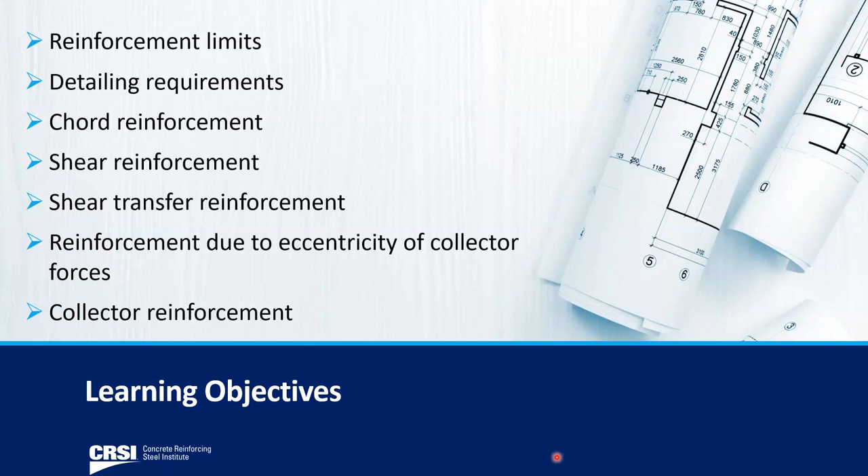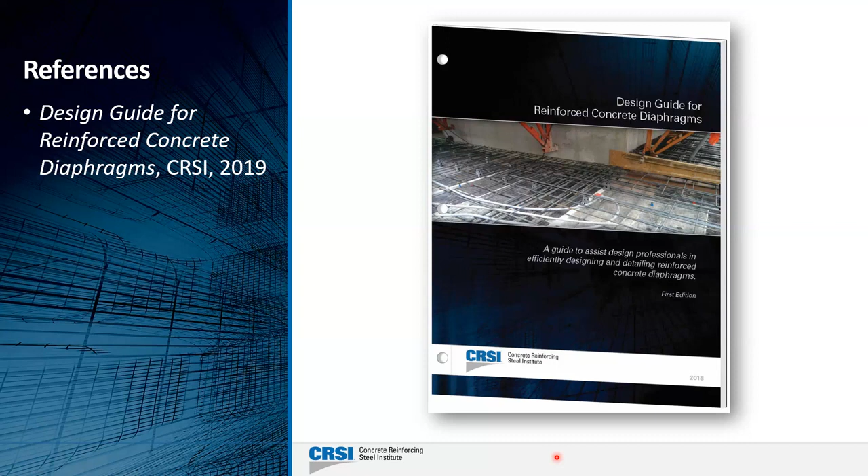So we'll start out by looking at some of the basic references this presentation is based on. We have a design guide for reinforced concrete diaphragms that we published not too long ago. It contains a lot of good information if you're not familiar with this type of structural element. It goes through how to determine the diaphragm thickness, how to get the diaphragm design forces based on ASCE 7-16 loads, and how to model diaphragms. Generally we have a computer program that will do this for us, and that's great, but it's also good to be able to check what's coming out of the computer program.

And if you have a simple structure, it may not be worth the time and effort to put it into the software. So for a lot of different reasons, it's good to have some simple models you can rely on. I've done a lot of comparison between these models and what you get out of a structural software program like ETABS, and for simple structures without a lot of different types of discontinuities, the numbers come out almost exactly the same. So you can rest assured these simple models give you good results.

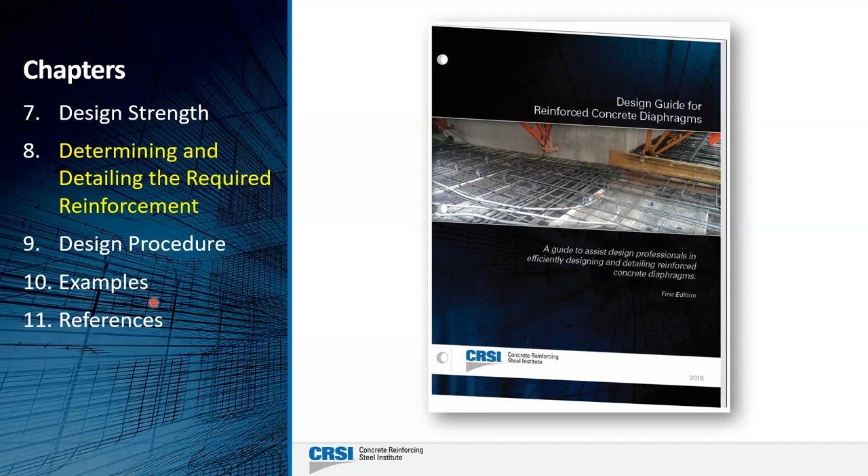We're going to focus on Chapter 8 of this publication, how to determine and detail the required reinforcement. Within our time, we'll give a brief overview, but it'll give you more information if you're not familiar with this particular topic. To round things out, there are a number of different examples that illustrate a lot of different types of structures in that design guide. So that gives you an overview of that.

You're going to see some references today for the ACI building code, and that's the 2019 edition. So if you see a section number from ACI, it's coming from that particular document. Also, there are some references to ASCE 7, and that's the 2016 edition. As you probably know, there's a 2022 edition that came out. Not too many changes for diaphragms, a few here and there, but basically it's more or less the same, especially for reinforced concrete structures.

So given that introduction, let's go ahead and take a look at some of the different aspects. We're going to start out by looking at the reinforcement limits for any diaphragm. If we're following the ACI code, you can find in sections 12.6.1 and 18.12.7.1 that if you have a one-way slab or a two-way slab acting as your diaphragm, the minimum reinforcement you have to have in there is for shrinkage and temperature, which is 0.0018 times A sub G.

A sub G being the gross area of the section you're looking at. Generally we'll do it per foot width, whatever the case may be. Very simply, generally speaking, you're going to get much more reinforcement than this unless it's a very lightly loaded structure.

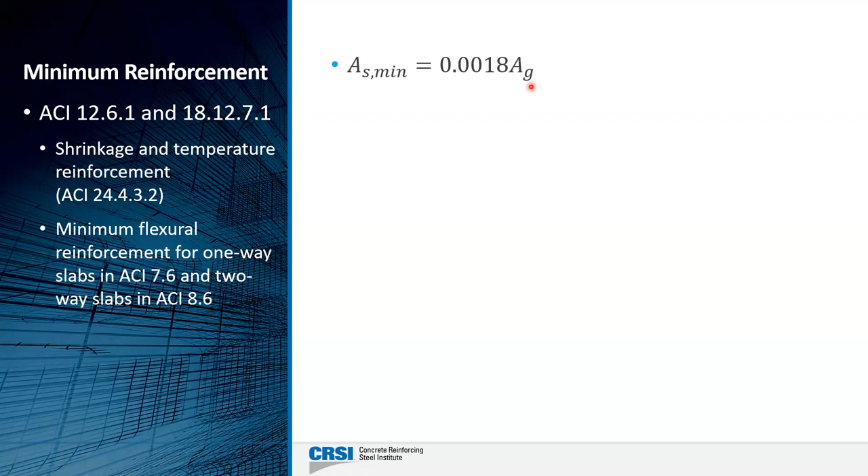One very important aspect to keep in mind, spelled out directly in ACI 12.6.3 - even if you're not following the 318 code, this is really mandatory. Any reinforcement required to resist in-plane forces has to be in addition to the reinforcement required for other load effects. So if I'm designing a two-way slab and I have all the bars I need in the column and middle strips for flexure, those bars are not permitted to resist any in-plane forces due to wind or earthquake effects. Any reinforcement for wind or earthquake has to be in addition to that.

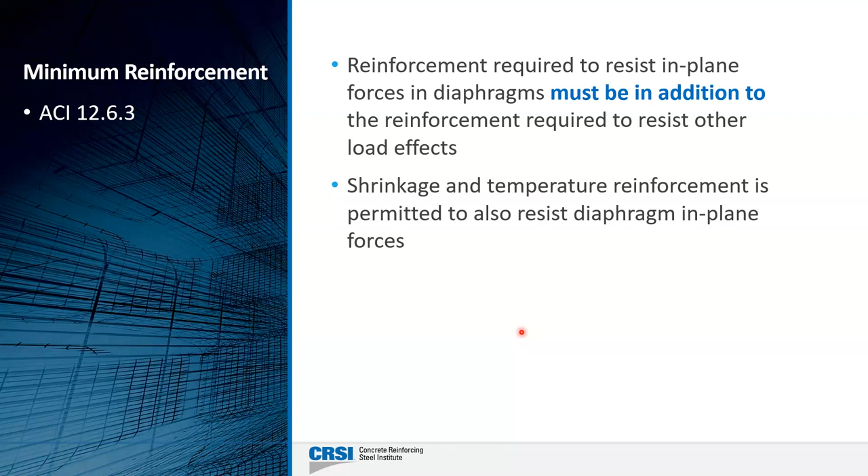The only exception is shrinkage and temperature reinforcement. The code does permit us to use that to resist some diaphragm in-plane forces, so that could be very useful. Instead of adding additional reinforcement in certain cases, if you have shrinkage and temperature reinforcement, it is permitted to resist some in-plane forces due to wind or seismic.

Reinforcement detailing requirements - what we did in the design guide is summarize in one table, specifically table 8.1, all of the reinforcement detailing requirements for diaphragms and collectors based on seismic design category. We broke it up into seismic design categories A through C and D through F.

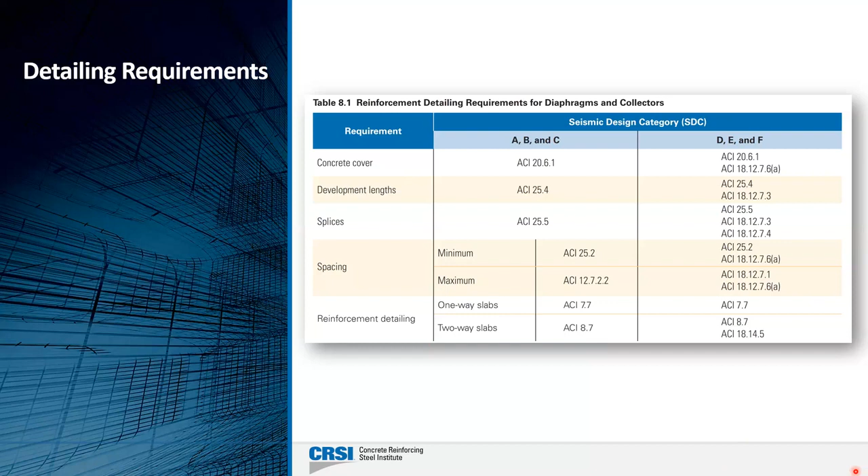For those of you who use ACI 318 all the time, I'm sure you'll agree that even after the reorganization, the requirements are all over the place. So we don't want to miss anything important, and that's why we summarized everything here in one table so that you're guaranteed not to miss an important detailing requirement for diaphragms and collectors based on seismic design category. You've got to go through multiple chapters, as you can see clearly here, and it's real easy to miss something. So we thought this table might be useful to get us in the right place and not miss anything important.

All right, let's start looking at all the different types of reinforcement and how to calculate it. We'll start with chord reinforcement. What I usually like to do is just take a simple case. We have this plan building here with walls in both directions, and we have this force V applied to this diaphragm - could be from wind or earthquake, whatever the case may be.

In this direction of analysis, if we know our concrete slab is rigid, which generally is going to be the case except for very long, narrow types of structures, we can count on it as rigid, and we can distribute this force V based on the relative stiffnesses of these walls. Once we do that, we can find out what the reactions are in each wall, and we can model this as a beam - a deep beam with 3 different supports. Knowing how that distributes across it, for this particular case it turns out to be a trapezoidal type of load. We know R1, R2, R3, and what W1 and W2 are, so we can easily draw the shear and moment diagrams.

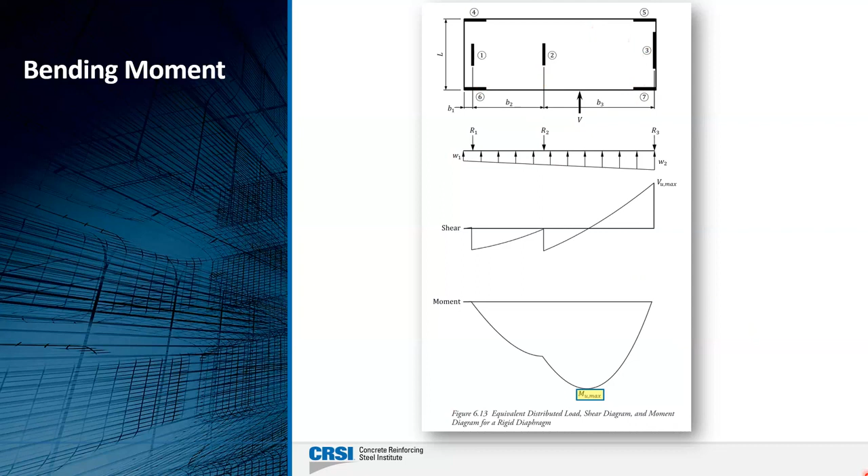So why do we need this bending moment? Because if we're assuming this is a deep beam, that bending moment is going to tell us how much chord reinforcement we need at either end, perpendicular to the direction of analysis.

We can calculate that very easily by taking the maximum moment we determined from our moment diagram and dividing it by the perpendicular distance between the tension and compression forces. Generally, we'll take that at about 95% of the length of the diaphragm in the direction of analysis. Now, as we know, this is a very simple approach, but like I mentioned earlier, it's going to give you good results when the building is simple like this, compared to your computer output.

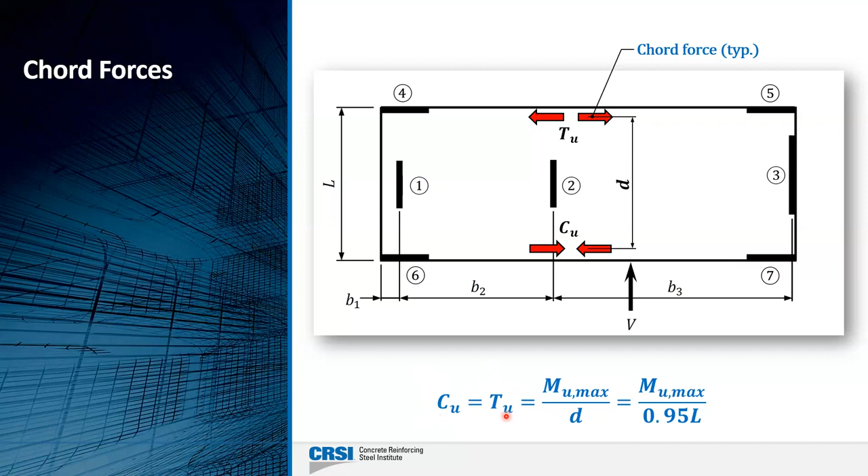So again, we're not too worried about the compression - it's the tension that we worry about. We calculate what that force is, and we set up our basic strength equation where that T sub U that we just calculated has to be less than or equal to the design strength in tension.

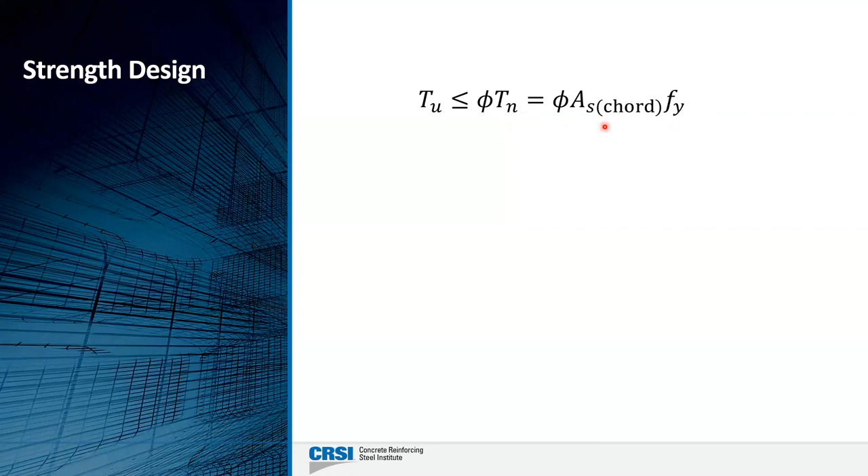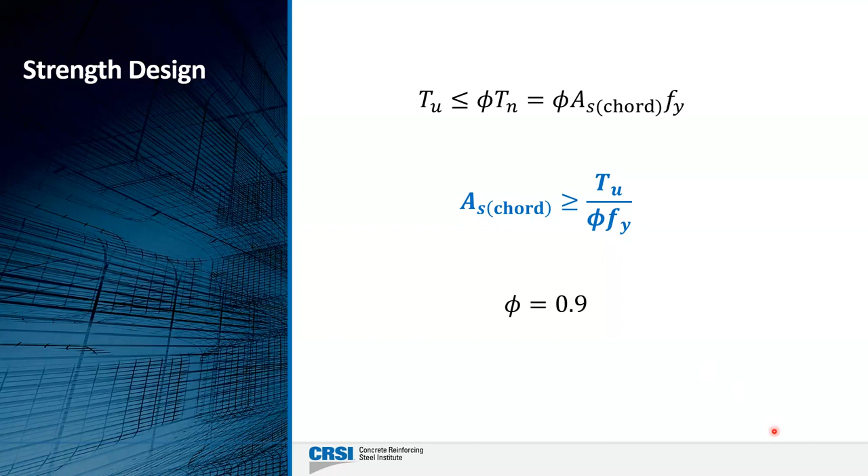Knowing that the concrete can't take any tension by itself, we'll design all of the chord reinforcement to resist that tension force T sub U. Solving for that, very simply, it's whatever T sub U is divided by phi, which we can take as 0.9 because it's in direct tension, and then the specified yield strength of the reinforcement. That gives us the chord reinforcement, illustrated here as these red lines. We need them at both ends, obviously, because the force can act in either direction.

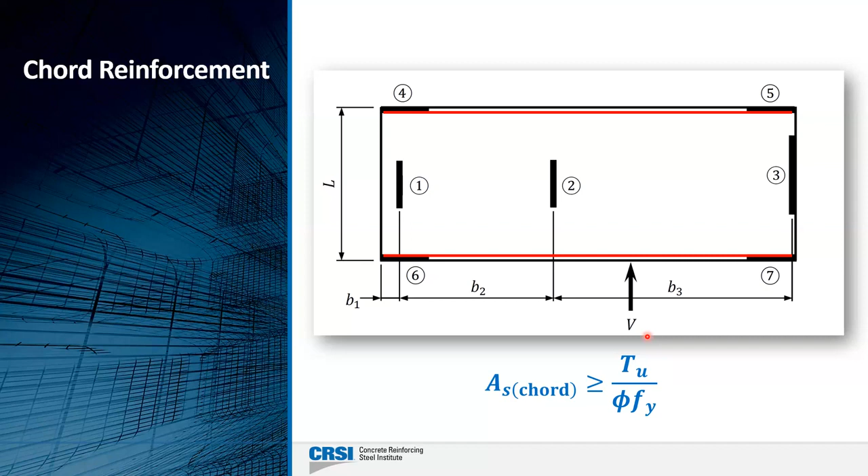Now, what happens when you have a fairly significant opening in your diaphragm? Generally speaking, if you have openings the sizes of elevators or stairways or any mechanical openings typical in a building, they're not going to have a big impact on how the forces get transferred through the diaphragm. It's only when you have a fairly large opening like illustrated here that we have to look at additional reinforcement. These gray areas we typically define as subdiaphragms.

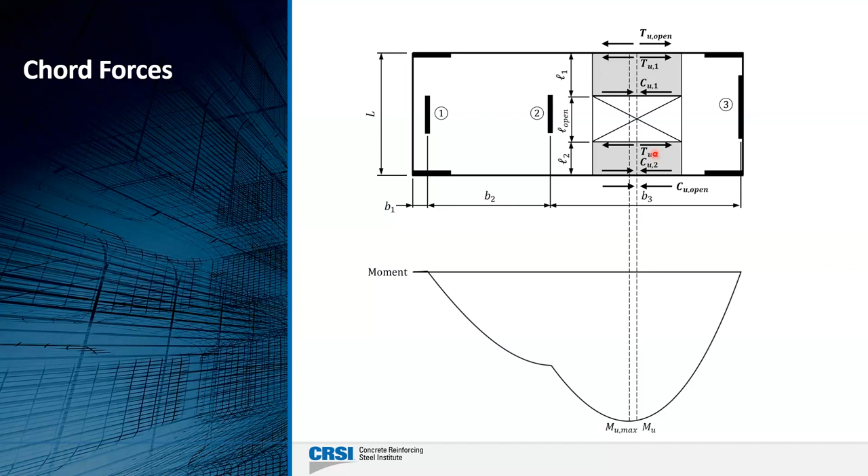So those subdiaphragms will also have tension and compression. To find out how much chord reinforcement we need, we look at the overall one and calculate it just like we did in that previous slide. But we also have to look at these forces that happen at the center line of the opening as well as in the subdiaphragms. The larger of the two forces is what's going to control and determine how much steel we need for chord reinforcement.

So we'll start with T sub U, which we define at the center of the opening, which we get from our moment diagram. We can calculate that as M sub U divided by, say, 95% of the diaphragm length in the direction of analysis. In addition to that, we're going to have this T sub U1 from the subdiaphragm. What we can do in that case is use this moment diagram assuming that the subdiaphragm is fixed at both ends. From that analysis we can find what the moment is at that location, which gives us the tension force in that subdiaphragm.

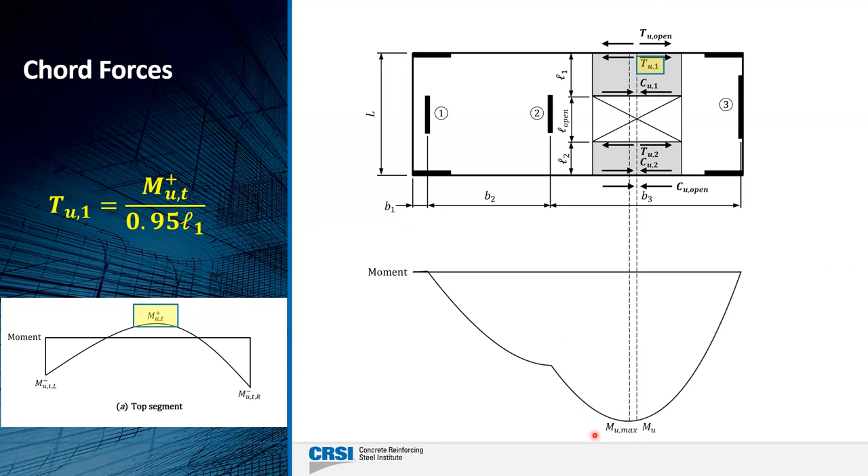So we have T sub U open, we have T sub U1. The addition of those two will tell us how much steel we need there. We compare it to what we have from M sub U max and use the larger of the two. This slide summarizes that for us: T sub U based on the maximum moment in the diaphragm, and then the summation of what happens at the opening. The larger of these two forces is what we would use to determine what our chord reinforcement is in that particular case. It's a simple way to determine what that extra reinforcement has to be.

Now, if you have a lot of discontinuities, or it's not as simple as that, then we recommend you use your computer program, and the finite elements will give you your best results. But something simple like this will give you a good idea of how much steel you need in this particular case.

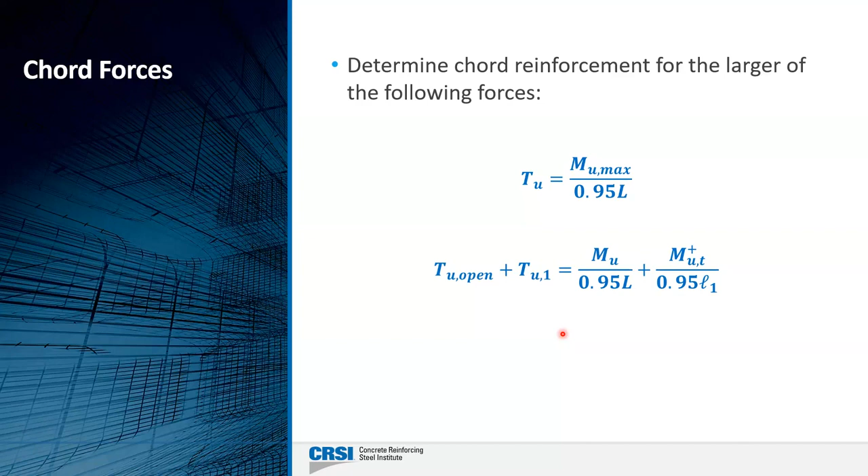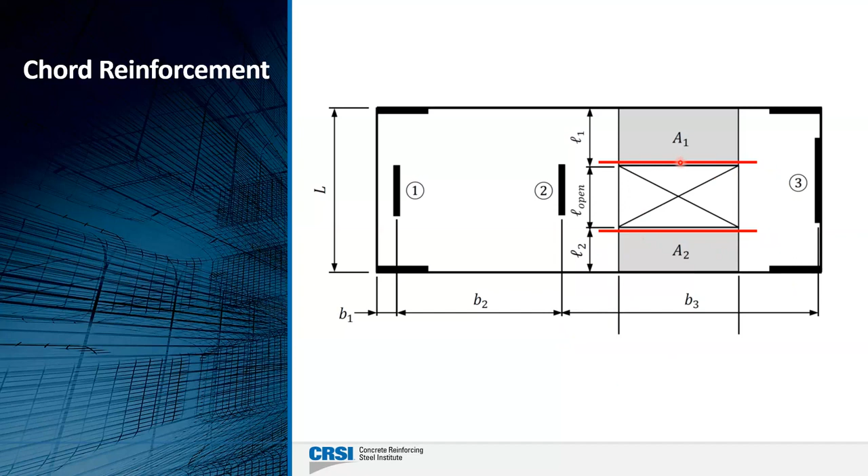So that chord reinforcement, again, because the force can act in either direction, that chord reinforcement is located around the opening as such.

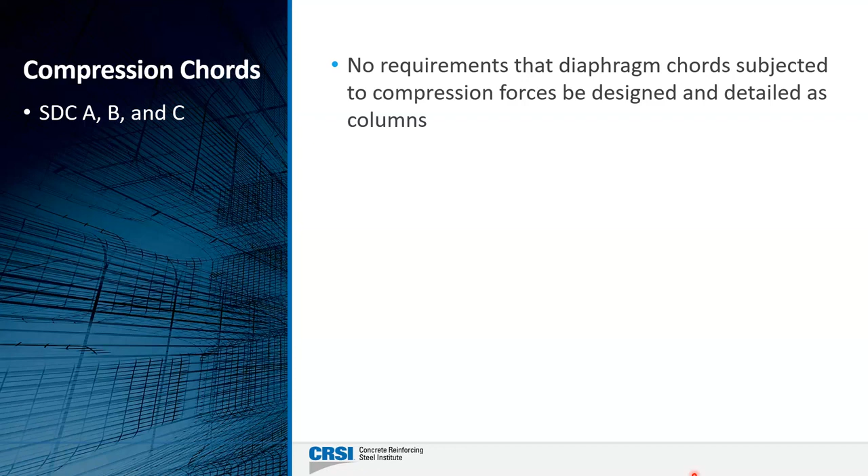Now, let's talk about compression just a little bit. As I mentioned earlier, generally speaking, compression forces are going to be transferred into the concrete and generally they're not going to cause any issues. For seismic design categories A through C, there are no requirements in ACI 318 to design these as if these were columns. So no special design or detailing requirements for those three seismic design categories.

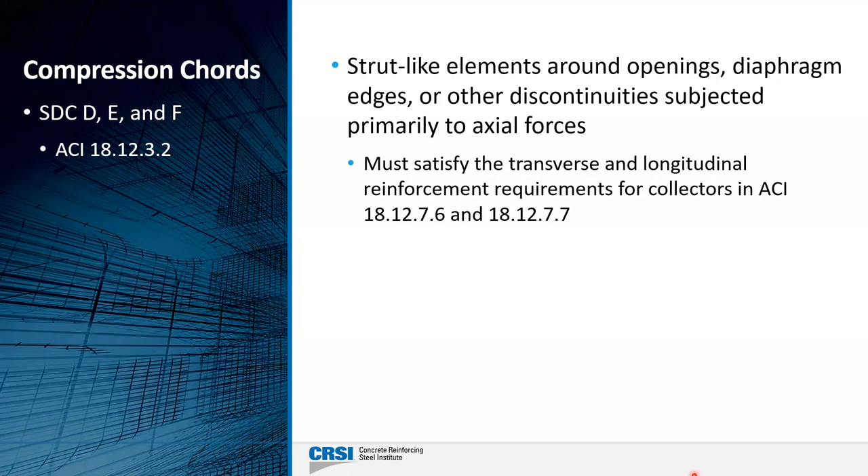However, once we have seismic design categories D, E, or F, then we have to start providing some special transverse reinforcement within that chord to prevent it from buckling due to the compression forces. So those requirements are given here in section 18.12.3.2, and those are summarized here for you in this particular case.

And it kind of makes sense, right? For seismic design categories D and above, you can have some fairly significant compression forces. This just ensures that we're not going to have any issues due to those larger forces.

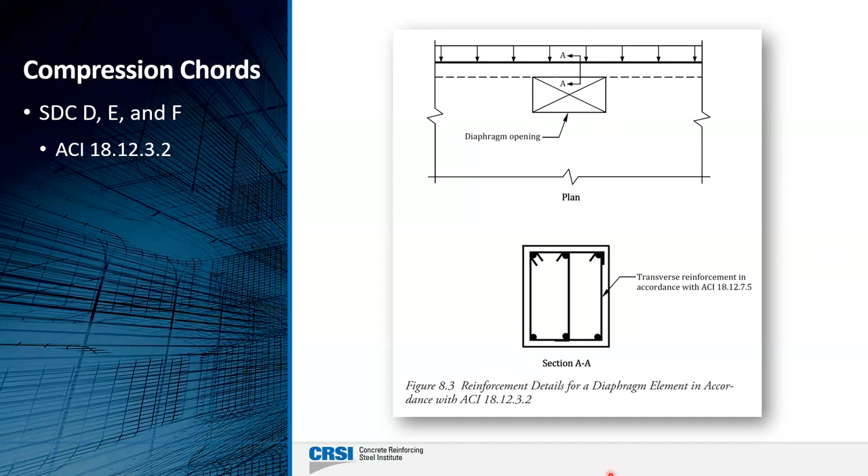Now, where do we place the chord reinforcement? As we noted before, it's placed perpendicular to the lateral force. It's provided in addition to any other required reinforcement that you might have in a beam or a slab at that location. If we have a slab that doesn't have any perimeter beams, we'll usually locate this reinforcement right at the edges of the slab, and it's generally tied to either the top or bottom flexural reinforcement.

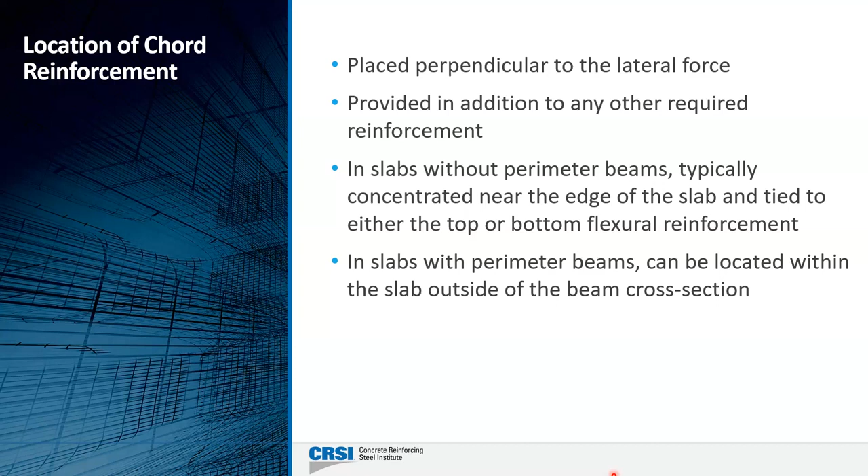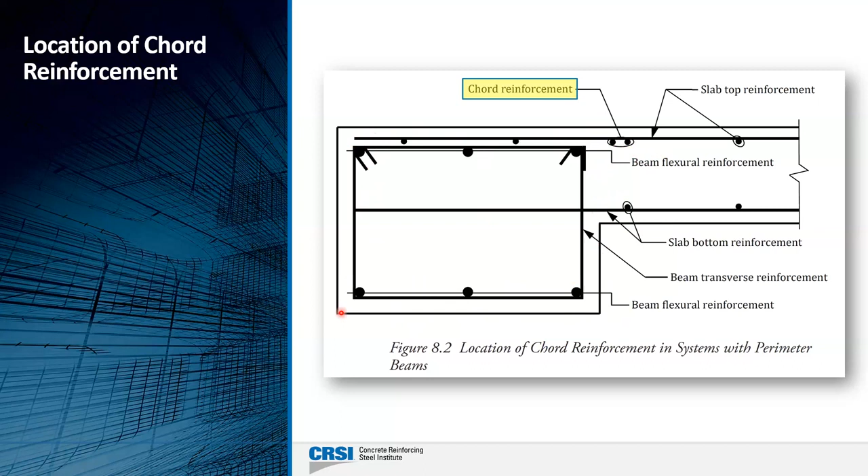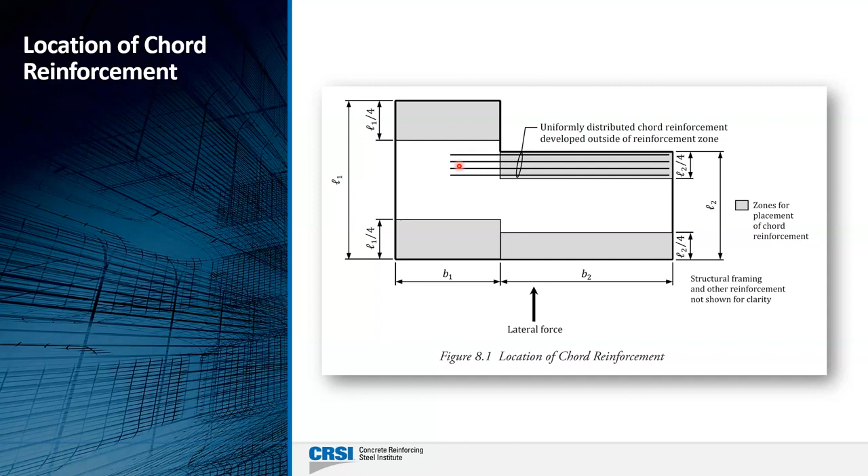Now, just to note, ACI 318 does allow you, instead of concentrating the reinforcement just at the edge of the diaphragm, to uniformly distribute chord reinforcement within the gray areas shown in this particular figure. So you can do that. In some cases, it might be better because of possible congestion issues or whatever the case may be. You do have this option. The only thing is, if you have a situation like this, you want to make sure that this chord reinforcement is developed into the adjoining part of the slab, tension development length into that adjoining part of the slab.

Okay, let's move on to shear reinforcement. So we have our chord reinforcement that takes care of the flexure part of our deep beam diaphragm, and we have shear reinforcement, possibly, that will take care of all of the other issues that we might have for that particular force. So we'll take our same building again, and we have our shear forces that are uniformly distributed along the lines where we have our lateral force resisting element. This is just a repeat of what we saw before. We'll know what the forces are in each of those walls.

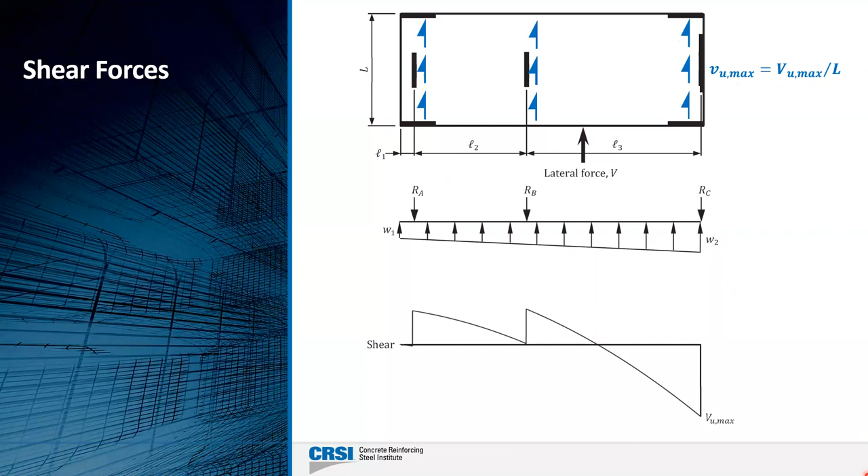So once we have VU max, we want to make sure that that's less than our design strength. And this is the equation for our design strength in shear, the first one here. We have ACV, which is the gross area of the diaphragm, minus any openings that might occur at that location. This first term is the shear force provided by the concrete. The second is the shear force resistance provided by any bars we have that are parallel to the direction of analysis.

Now, generally speaking, because of their overall geometry, it's not uncommon for VU max to be less than or equal to just this part here due to the concrete. So usually what I'll do is calculate V sub U and then check this part here, just the 2 lambda square root of F prime C. Lambda is that lightweight concrete factor. Usually that's going to work, and then I don't have to worry about providing any additional shear reinforcement.

If we do have to provide additional shear reinforcement, generally what I'll do is combine it with the reinforcing bars we have for flexure in the direction of analysis. So if I needed, say, 0.3 square inches per foot, and then another 0.1 square inches per foot for shear, I'll combine the two together, 0.3 and 0.1, so 0.4 square inches per foot. Again, we're using the same bar, but we're increasing how much area it is, so we're not violating that rule in terms of not using the same reinforcement to do two things.

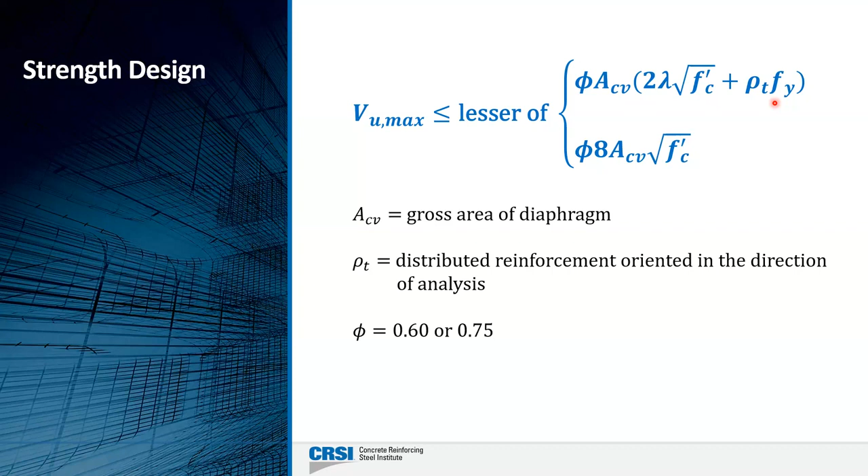Now comes the big part, the shear transfer reinforcement. How do we get the forces from the diaphragm into our lateral force resisting elements and any collectors that might be present in our particular case? So shear transfer reinforcement must be provided between the diaphragm and the vertical elements of the lateral force resisting system and the diaphragm and any collectors you may have in that direction of analysis.

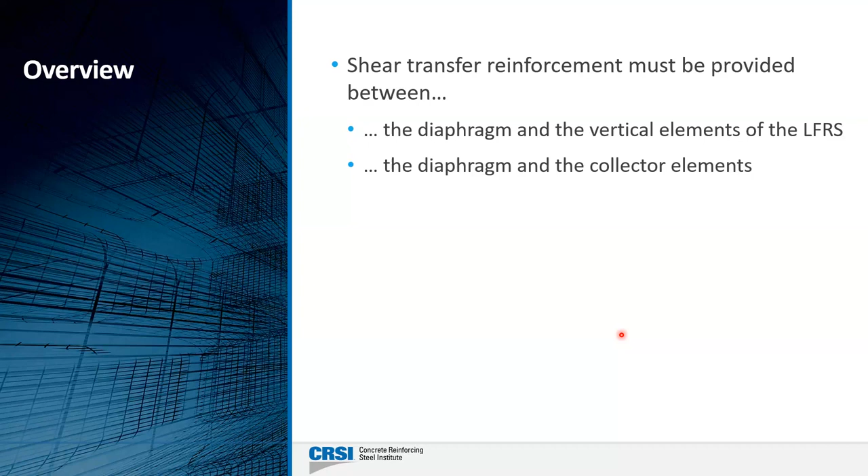How do we do that? Well, we can calculate what the shear flow is along those lines, take that shear force, divide it by the length, and get our shear flow, and then calculate it based on shear friction. So V sub U at any location divided by phi for shear. Mu is a coefficient of friction depending on what type of situation we have in terms of concrete that's cast later with a cold joint or not.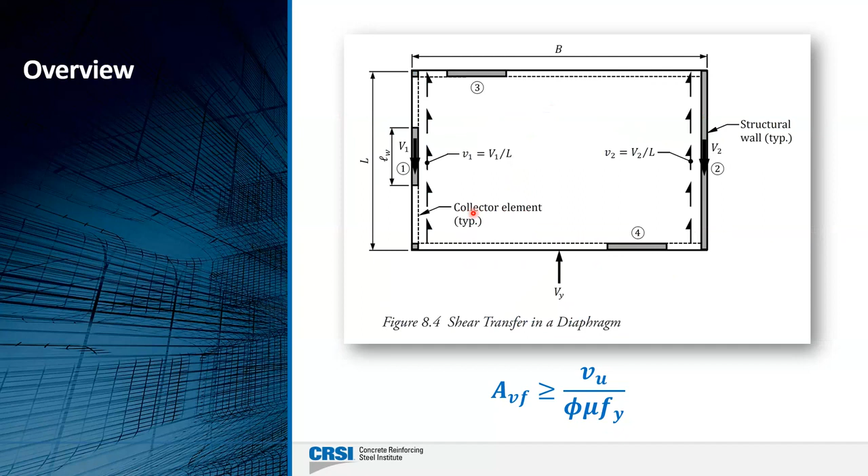And then F sub Y, of course, our yield strength of reinforcement. So what is this coefficient of friction? If the concrete is placed monolithically, like would be the case for the slab, the diaphragm, and this collector, then it's equal to 1.4 times this lambda, which is the

Lightweight aggregate factor that decreases the strength because of the lightweight concrete. When concrete is placed against hardened concrete that's clean, free of laitance, and it has a full amplitude of 1/4 of an inch, you could take it as 1. This is generally when you have a cold joint. Another cold joint where it's not intentionally roughened, it's 0.6 times lambda. So this is the table from ACI 318 where you can find that coefficient of friction.

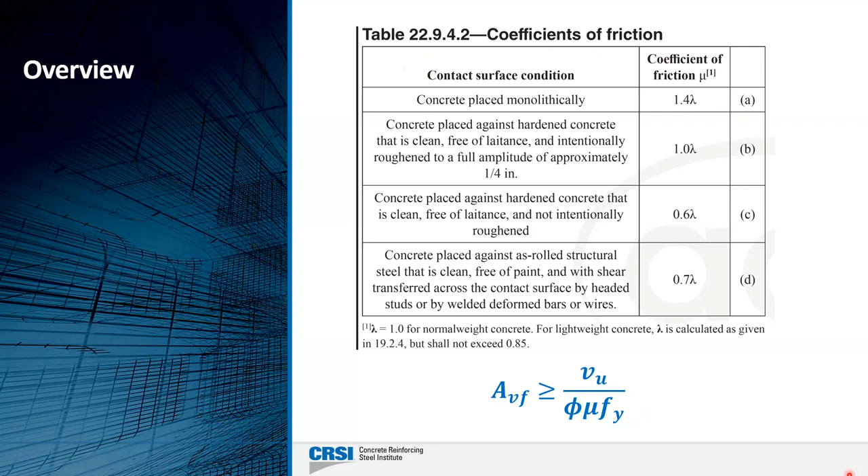So let's look at wall 1. If we want to find the shear transfer reinforcement between the diaphragm and the face of this wall, we take that shear force at that location we have determined from analysis, V1. We divide it by the length of the wall. That's the shear flow. That is the shear flow over the length of that wall. And then we divide it by phi, mu, and F sub Y.

And that'll give us how much shear friction reinforcement we need that will be placed perpendicular to the wall. And that reinforcement will transfer its portion into the wall.

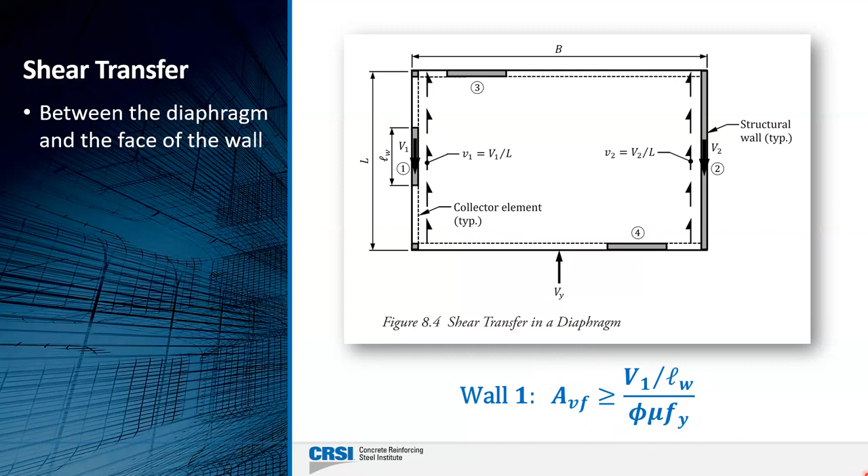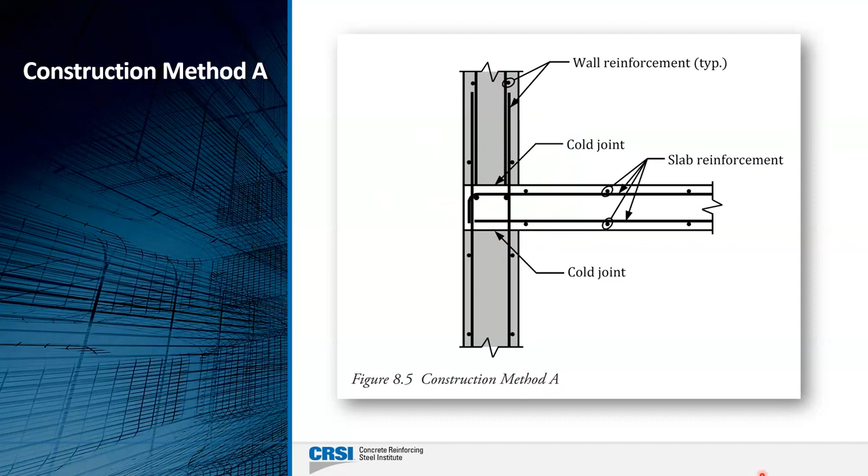Now, there's generally two different construction methods, especially for building structures. One method is where the wall is built up to the underside of the slab, then the slab is constructed, and then the wall above is constructed. So you're going to wind up with a cold joint above and below that slab. And we need to find out what the forces are in order to put the right numbers into that equation that I just showed you.

So you could start here at this location, where in this particular case, we're going to assume the collector is the same width as the wall, and that'll become evident once we get into the next couple slides. So at that location, we don't have a cold joint because the slab is cast all itself. We know what the shear force is, and we use the appropriate mu to find out how much dowel reinforcement. That dowel bar is noted here. That will be developed into the wall and into the slab by L sub D, and those are our shear transfer bars that will transfer that shear force into the wall.

Okay, so that's one location. What if the collector is wider than the wall? Sometimes we have to do this because, especially in higher seismic design categories, those forces in the collectors start to become very large. And they can't be transferred into the wall itself, especially if you have a very narrow wall and the slab is the only part that's able to transfer it.

So you could transfer a part of it into the wall and a part of it into this effective width, which we generally take as the thickness of the wall plus the length of the wall divided by 2. In this case, this would be the equation to determine how much shear transfer reinforcement you need between the diaphragm and the wall.

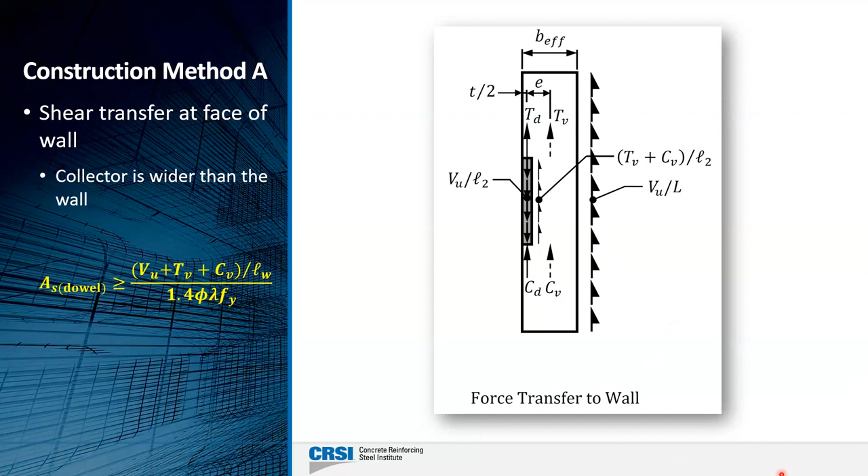There's two other joints we need to look at. The joint here, this cold joint between the wall and the slab, this would be the appropriate equation to use to determine A sub S.

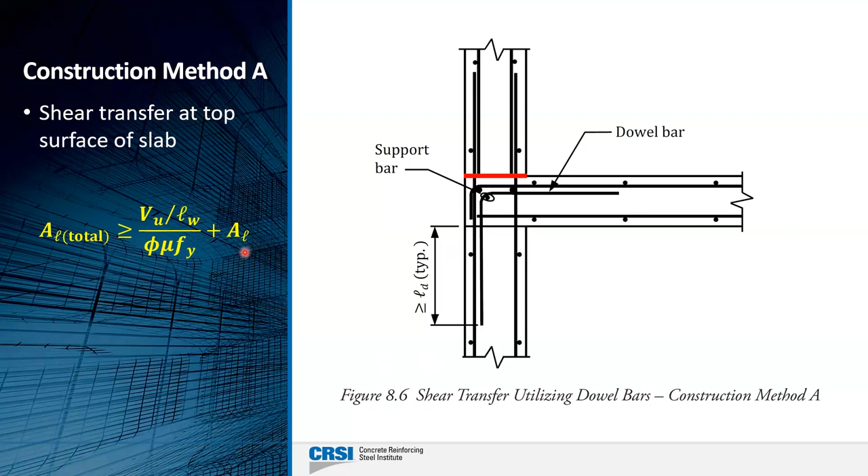And we also have the cold joint at the top, and this would be the appropriate A sub L, which is the entire shear transfer plus how much reinforcement you need into the wall for the strength of the wall itself. So you look at all of those different areas of steel, and obviously you would use the larger of those.

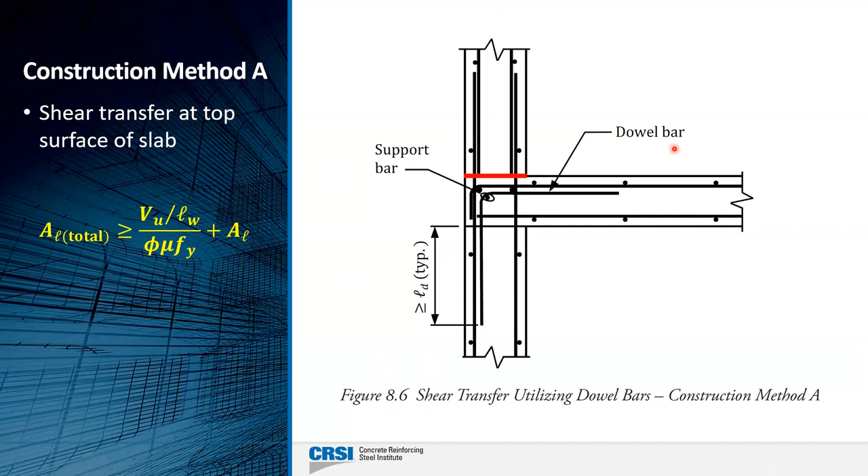And provide that dowel bar at a certain spacing along the length of that wall. So that's construction method A. Construction method B is where the wall is cast before the slab is cast, and we come back and put these form savers in. Form saver is nothing more than we're going to take the slab reinforcement and basically screw it into this form saver.

There's threads at the end. There's all different types of proprietary systems, but your cold joint is here, and we would have to provide similar type of dowel bars. Now here we illustrate a hooked bar and we illustrate a headed bar. We don't usually recommend using the different ones at the same time. It can be done without any issues, but this is basically for illustration purposes. Sometimes a headed bar, especially if you have congestion, will eliminate some of that congestion.

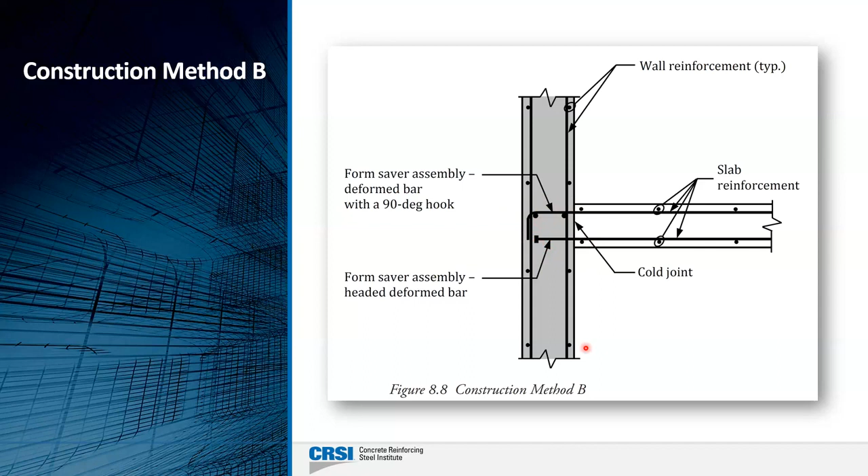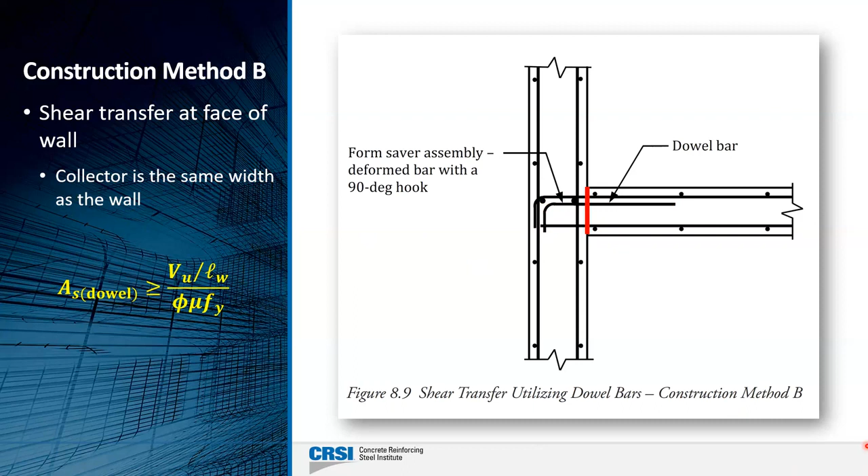That's the case where the collector is the same width as the wall. We could have it also wider than the wall in this particular case as well.

Okay, so now we have the shear transfer reinforcement between the diaphragm and the wall. What about between the diaphragm and any collectors? Over this area, we'll need possibly additional reinforcement as well. That reinforcement is the shear force at that location divided by the entire length of the diaphragm. And because the slab and the collector is generally cast at the same time, mu is 1.4 times lambda. Again, depending on the case, more often than not, this amount of transfer reinforcement is very small.

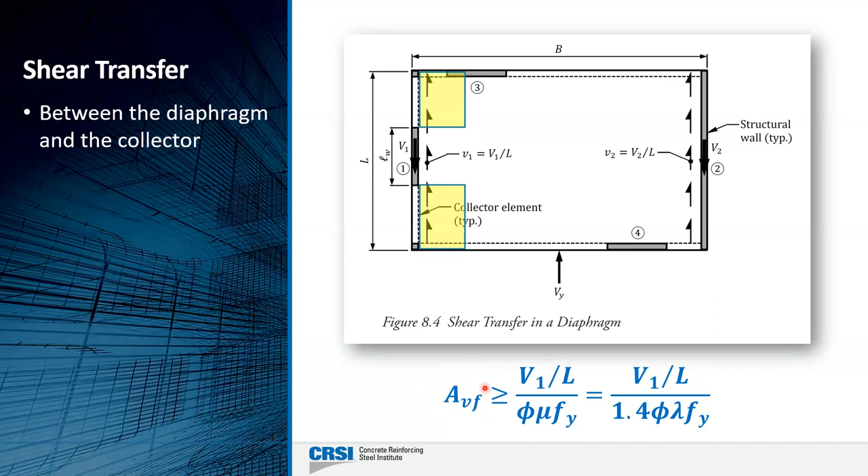And whatever bars that you have for flexure will have enough capacity to be able to carry both the flexure and any transfer between the diaphragm and the collector. There could be cases where you need to beef those up a little bit, but generally speaking, you won't have to worry about that.

Now, we're going to look at reinforcement due to eccentricity of collector forces. This is the case where we make the collector wider than the vertical element it's framing into. So we saw this basically in the last couple of slides.

As I had mentioned, it's up to the designer to transfer as much or as little force directly into the shear wall. That's represented by C sub D and T sub D, compression and tension. In terms of C sub V and T sub V, the amount we're going to transfer by shear, we could take this as whatever percentage we like. We could even make it 100% and not transfer anything directly into the wall.

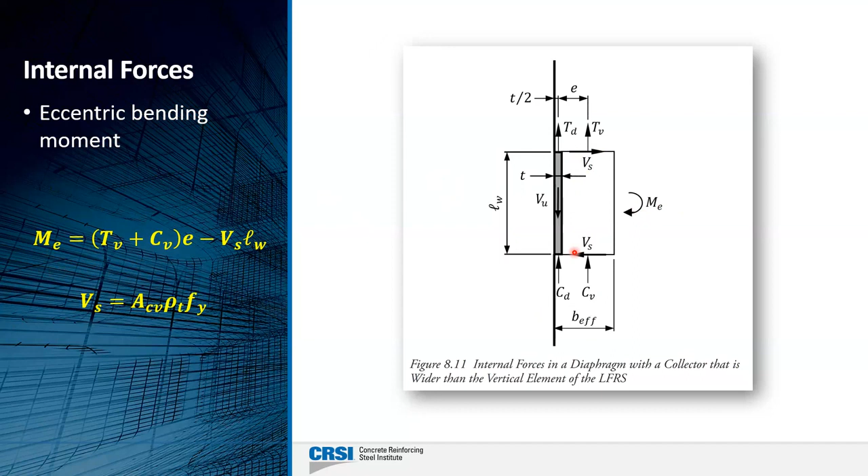Okay, so if we go back again, this moment will be distributed over basically this length here, the length of the wall, but we'll take 95% of that length to get it to say the centroid of that reinforcement. So again, this is a tension force. So we take that moment, divide it by that moment arm, and then divide it by phi, which is 0.9, and F sub y. That'll tell us how much reinforcement we need perpendicular to resist that moment.

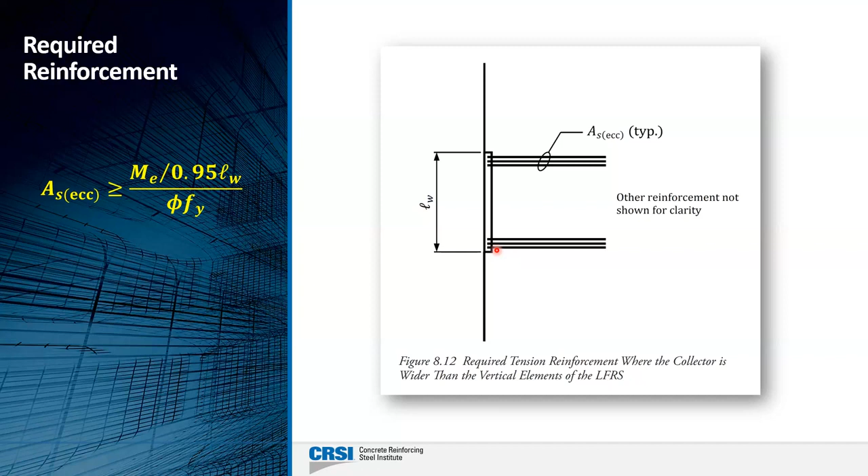Now, you don't need this reinforcement if you're transferring all of the diaphragm force directly into the wall. It's only when our collector is wider than the wall it's framing into.

And finally, we'll look at collector reinforcement. Collector reinforcement is going to depend on, again, if you're going to take that collector as wide as or wider than the vertical element it's framing into.

So we'll take that generic building that we had before. We'll look at the shear flow at this particular location. From analysis, we'll know what V sub U is in that wall. We take V sub U divided by the length of the wall, L2 in this case, and that's the unit shear force across the wall, the length of the wall. We take that shear force V sub U and distribute it over the length of the diaphragm. That gives us the shear flow here.

So the net difference between the two is our net shear force along the length. Between the end of the diaphragm and the beginning of the wall, the shear flow is VU over L. Over the length of the wall, it's the difference between the two: VU over L2 minus VU over L. And at the latter part, it's nothing more than the same VU over L.

To determine our collector axial forces, it's very simply done by taking the area under the net shear force diagram. So between the end of the diaphragm and the beginning of the wall, that's V sub U divided by L times this length L3. From the other end of the diaphragm to the beginning of the wall, it's nothing more than VU divided by L times its length L1.

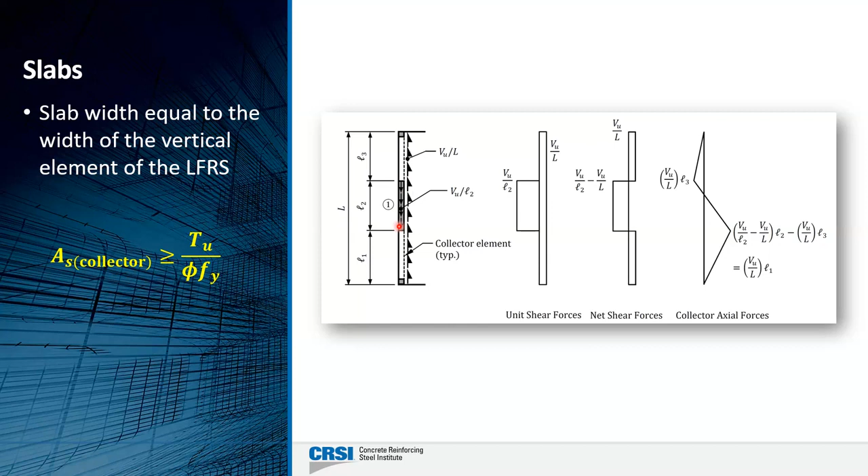So how do we detail it? We'll calculate A sub collector, and put whatever bars we need, making sure that it's in the cross-sectional area of the wall that we're transferring the shear force into. For seismic design category A through C, this can usually be done without any issues. Once you get into the higher seismic design categories, you might have issues with congestion, and that's why you may want to take this out into an effective width and transfer it over a wider width to avoid that congestion.

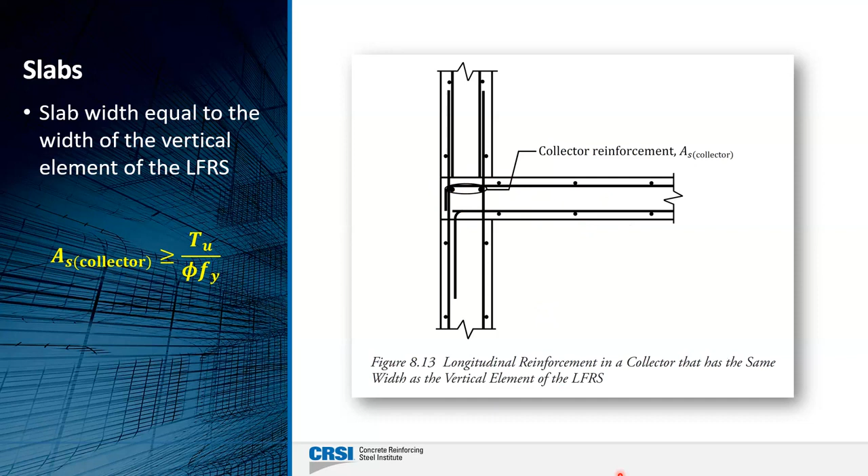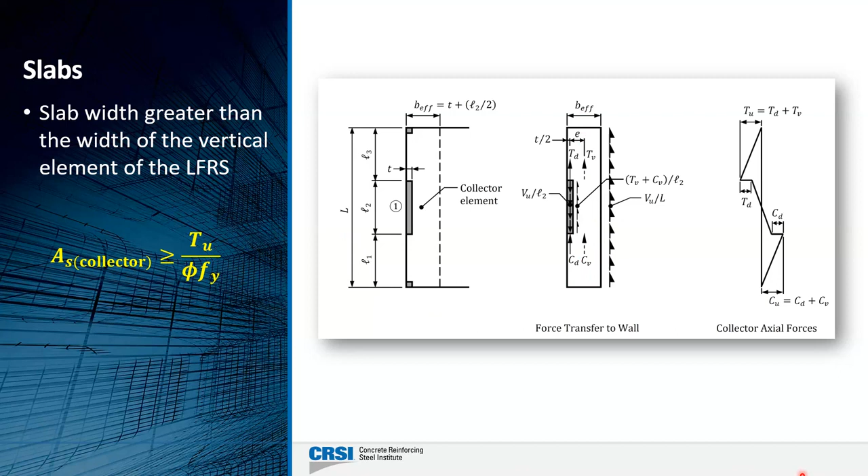In this case, depending on how much you're transferring directly into the wall and how much we're transferring by shear, you'll calculate your total A sub S and then proportion it accordingly into the wall and into the remaining part of the effective slab width that we've assumed in this particular case.

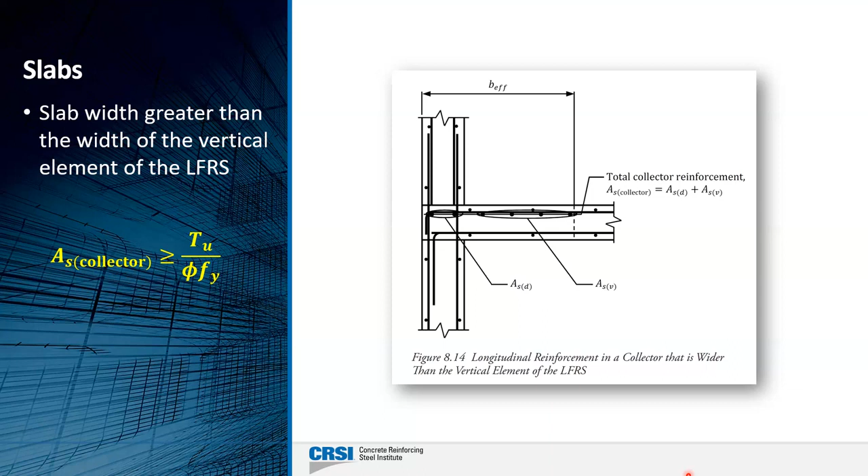So that's the case when we have slabs acting as collectors. When we have beams that are acting as collectors, it's a little more complicated. These beams will generally support not only their own weight, but a fairly significant part of any floor load. So we're going to have flexure to worry about, shear, torsion if it occurs at the edges of the building, in addition to our axial compression and tension forces due to the shear transfer into the diaphragm.

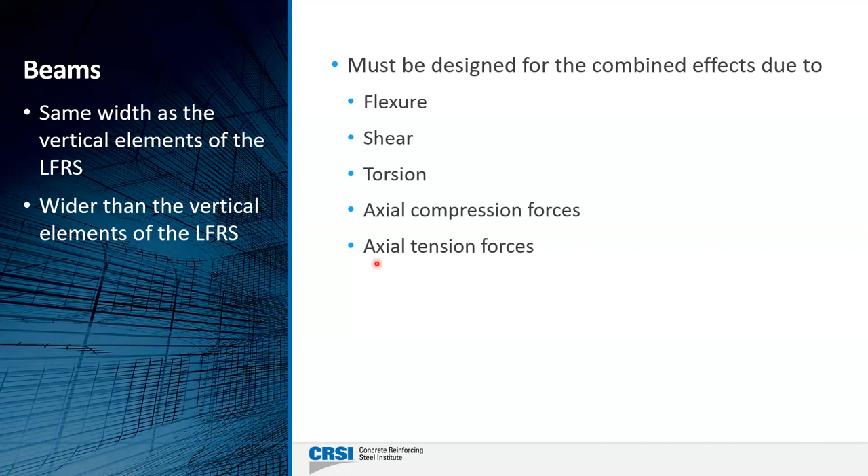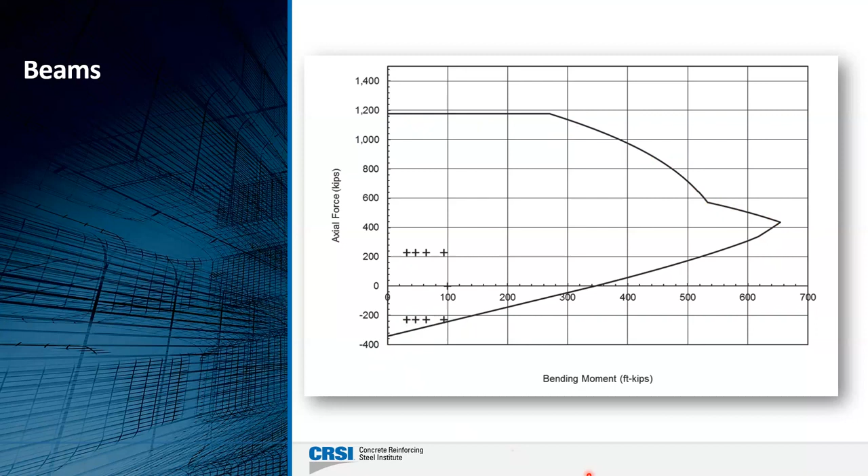So these are generally designed as, say, a beam column where we have bending and axial compression and tension. The best way to see if things work or not is to get your beam size, put some reinforcement in, and then see where your loads in compression, tension, and bending occur, and make sure all of those load points fall within your interaction diagram. That's generally the simplest way to check if these beams are adequate to carry the combined effects of gravity and axial compression and tension due to our lateral forces.

Now, if we are in a building that's been assigned to seismic design category D, E, or F, there are some special detailing requirements that we have to provide once again. We want to make sure we have enough confinement. Say this is our collector beam in this case. So we have to have a certain amount of confinement when we're in seismic design category D through F.

This figure 8.17 in the design guide summarizes all of the different transverse reinforcement requirements that need to be satisfied, depending on what the axial compressive stress is in that particular collector. It also tells us about spacing, both in the vertical direction and along the length of the beam. So all important stuff to keep in mind once we have a structure assigned to D, E, or F.

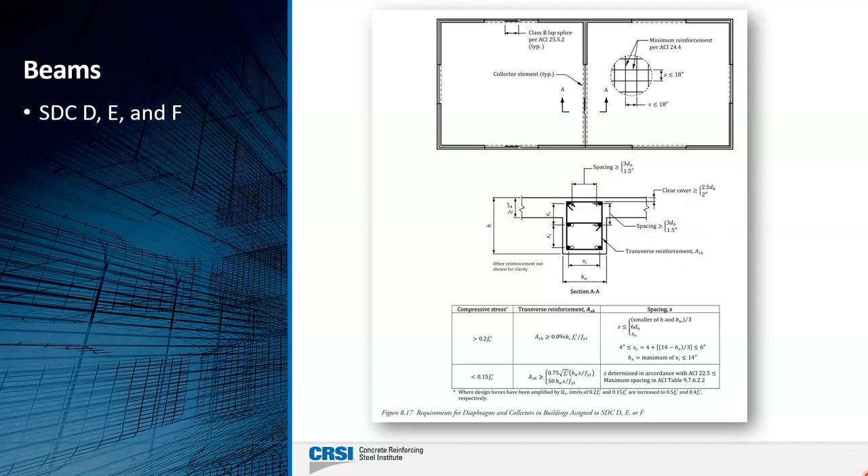Last two slides I'm going to show you are a summary. For the two different construction methods, we provide a graphic summary of what reinforcement is required and where the equations are in the design guide to calculate that reinforcement.

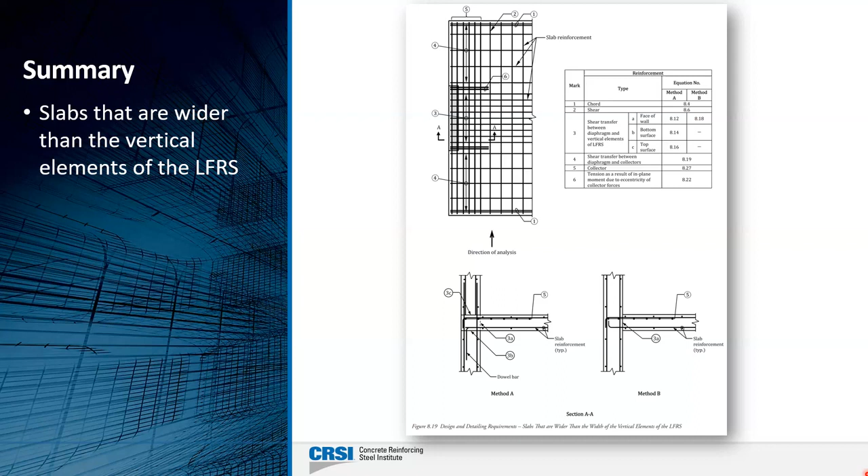So what we saw here today was a general overview of what you need for these particular types of structures. There's a lot of other things that can go into detail, but I think this gives a pretty good overview of what is required in this case.